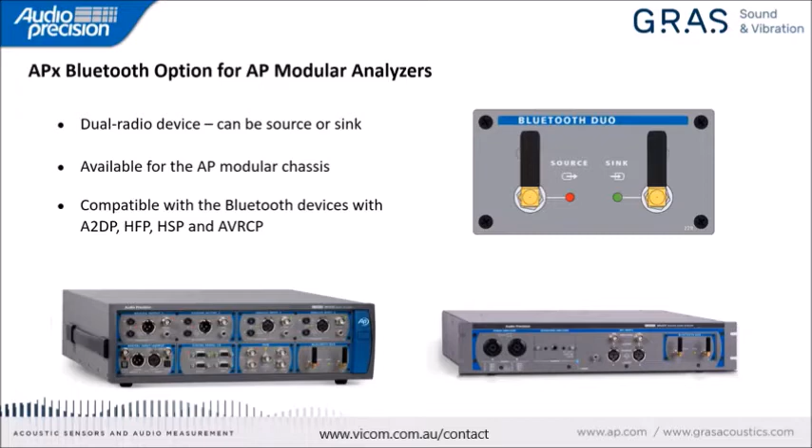And this device, whether it's acting as an input or an output, acts and behaves like any other of the modules that we produce, which means it's just another source or sink, another part of the system, and there's nothing that feels poorly thought through or not really purpose planned like this module is. So we'll be talking about that along the way. I'll highlight a couple of cases where I think the implementation is quite smooth.

All right, so as you move towards starting to get ready to make measurements, maybe the first thing to say is that you should know about the DUT, the device under test that you plan to test. Every one has its own personality and control process. This particular unit, one of the things I needed to know about it is that it has a pair of front speakers and a pair of back speaker outputs, and the hands-free phone support is only available on the front speakers. So that makes sense, assuming that the driver might be the one speaking and you'd want the speakers for the driver to hear up closest to the driver.

And so that was one element that was important. If I had picked the wrong set of outputs, I wouldn't have ever been able to measure the hands-free phone output signal. The other one is that this volume level that's controllable through the knob on the front panel of the DUT is automatically reduced to minimum at power up. And so it's necessary to set that level, and we'll be talking more about that in a minute or two.

And then the other thing is to know what profiles your DUT supports. I'm going to spend a little more time talking about profiles to drive home the point of why this matters. Some profiles have higher quality signal or perhaps less latency through them, and that impacts your measurements. So this is an interesting thing to have some knowledge of.

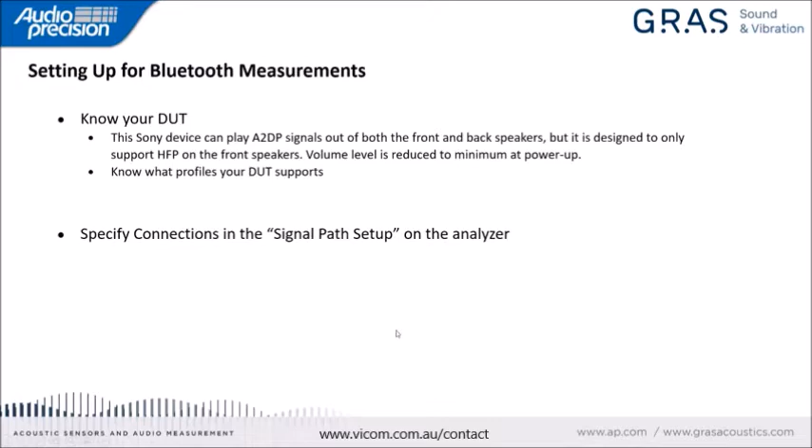All right. You likely know from working with your Bluetooth speakers at home, or perhaps you've already done a lot of this testing. There are really 3 steps that need to be done in order to connect up to a device before you can make any sort of measurements. And so the connection process is basically a discovery process where the analyzer scans the area and lists any Bluetooth devices that are not hidden, undiscoverable.

And it may well be when we take that step here in the demonstration that you'll see other devices besides this particular unit that I'm planning to do some testing on. Once you've gone through the discovery step, the next step is pairing, and it's pretty straightforward. You hit a button and the 2 devices kind of handshake across with each other and complete that process. And once they're paired, then you make a connection to the device and you're ready to do some testing.

So these are key steps, and it's really easy to forget or miss part of it, or get halfway through a process and want to stop at a point and restart it at that point, and you might find that you need to redo this process in order to get back to a known state.

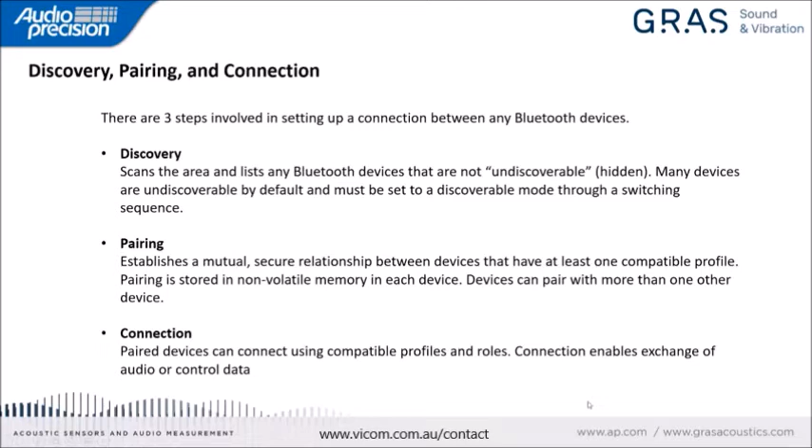All right, so here's some status indicators. You'll see these on the actual analyzer display in a couple of minutes, but I'll talk through the fact that there is a status indicator for both output, shown here, and input, which I'll show you on the next page. And this gives quick at a glance information about the state of the Bluetooth connection, or in fact any other kind of connection. We could potentially have a PDM output or something if we're testing different devices.

But in this case, we would see that the output was set to Bluetooth. It would have a device descriptor. It would tell us what mode we're in, whether we're in A2DP or HFP. And if we're in HFP, then we have this SCO, and it is either in a state of not connected or connected. And if you see the big red bar on the screen, you won't be able to do any testing until the device is actually connected and going. So we'll talk about opening SCOs as we go along here.

And this second line shows what it looks like when everything is copacetic, when it's all working like it should. And so it tells us the same information we saw up here. It tells us which codec is being used and the sample rate. So SCO, which I mentioned up above, is synchronous connection oriented link. And it's a protocol used for voice data transmission. CVSD is a continuously variable slope delta modulation codec. There are lots of codecs for different purposes. This is one example that's used in Bluetooth, maybe the most common for hands-free phone work and headset work.

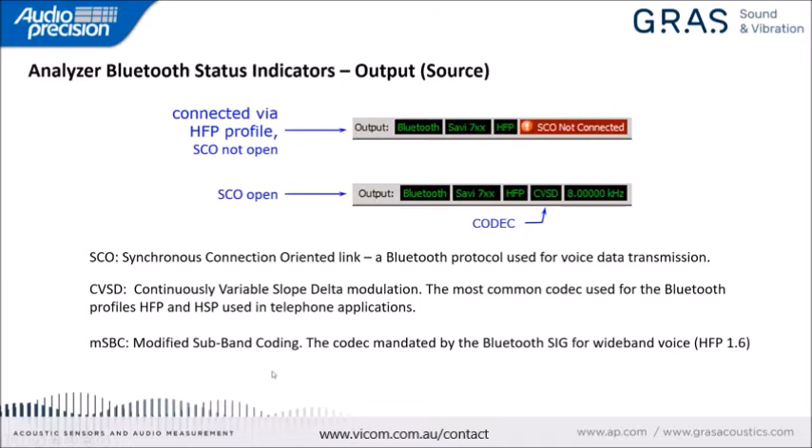Here is an example of the full monitor status indicator bar, and it's showing that we have an output that is an analog unbalanced 2-channel connection, and input as Bluetooth with a new device that we haven't talked about, just a different device. In this case, we're doing streaming audio, and it's an A2DP connection for the profile. The codec is SBC, and the sample rate is 44.1 kilohertz. So this is what you expect to see, a lot of nice green information across here. If something's red, there's a need to stop and look at it.

And it's probably worth mentioning the Bluetooth special interest group. It's referred to as the Bluetooth SIG. That is the standards body for Bluetooth, and they've specified that SBC codecs must be included in any A2DP connection.

It's possible to use other codecs that might have better performance, but this is a single codec that must be in the system for any device to use that might want to do streaming audio.

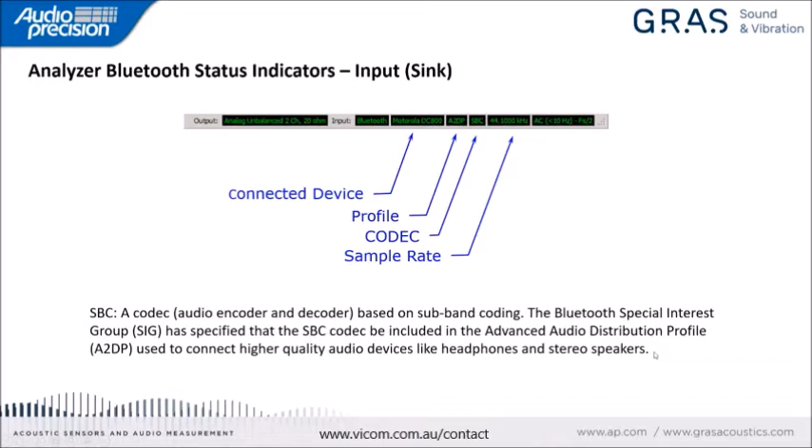All right, so with that, I think we'll move on to hopefully some more interesting stuff than just looking at slides. And what I'll do is just briefly drop this out of the way. And what you see in front of you now is the user interface for the Audio Precision APx 500 analyzers. This software is compatible with a broad range of analyzers, starting down at relatively low price and performance range, and going all the way up through our APx 555 industry-leading performance unit. So that once you're familiar with this user interface, it becomes easy to use any one of the analyzers.

I'm going to take a couple minutes to just introduce, for anybody who maybe hasn't used this software before, what the layout is, so that you get some better comfortable feeling about what's here. Over on the far left side, there's a box called the Sequence Navigator, and this area allows you to pick and choose tests that we provide in the software and place them in any sequence you prefer, and then to string them together so they'll all run sequentially, all without writing any programs. So automation is kind of built in this from the beginning.

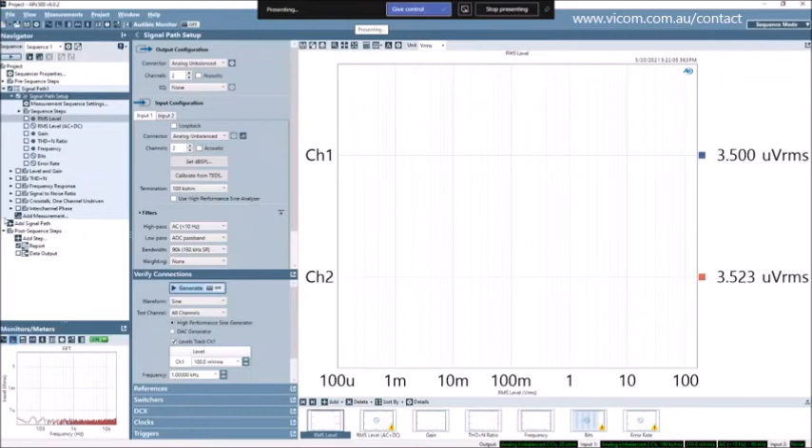In the center here, or somewhat center, is the signal path and measurement setup area. So in this area, I define what I'm going to use for an output device and what I'm going to use for an input device. And then I've got down here a little panel that allows me to verify connections. So this is used for defining what channels will be used and what kind of channels they will be. So for example, I have a lot of choices here, and there are a number of other things in my system. For example, a PDM module that I could use if I was testing, for example, digital microphones.

So this panel toggles with this arrow up here, and if I select a particular test, then it becomes the control panel for that test. And so here you can see I've selected frequency response, and I've predefined in this case what the frequency range should be and what the level should be, and I can go in and change any of these that I choose to. And once I'm done with the setting and I have valid connections, I can run the test, and running the whole sequence is simply pushing this button right here. An individual test can be run hitting this button, but it doesn't execute the whole sequence.

And then finally, this area is obviously the data display. And depending on the test you run, you may get 1, 4, 10, 12 different types of measurements as outputs from the tests that you perform.

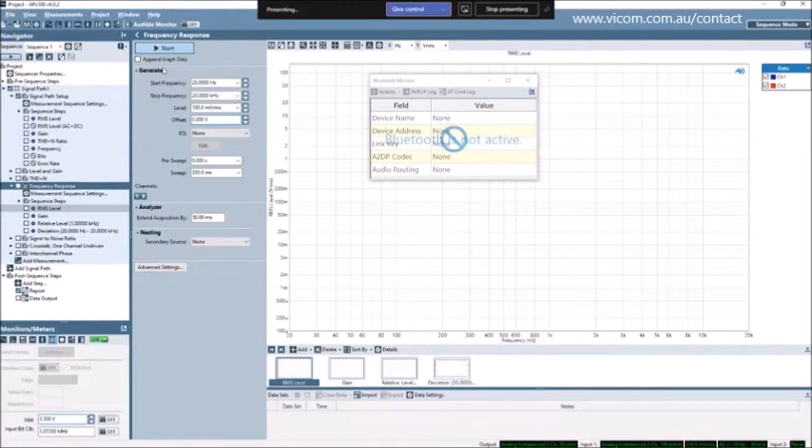And again, kind of circling back on that comment I made earlier about integration, there actually is a Bluetooth monitor. And if we pop this up so we can get a closer look at it, you can see that there's a number of different things. Now, at the moment, this is not active because I haven't chosen any Bluetooth channels.

But as soon as I do that, then it's active. And there's another really great bit of integration here that's a very commonly used panel. I'll call it back in a minute so that I can finish talking about this.

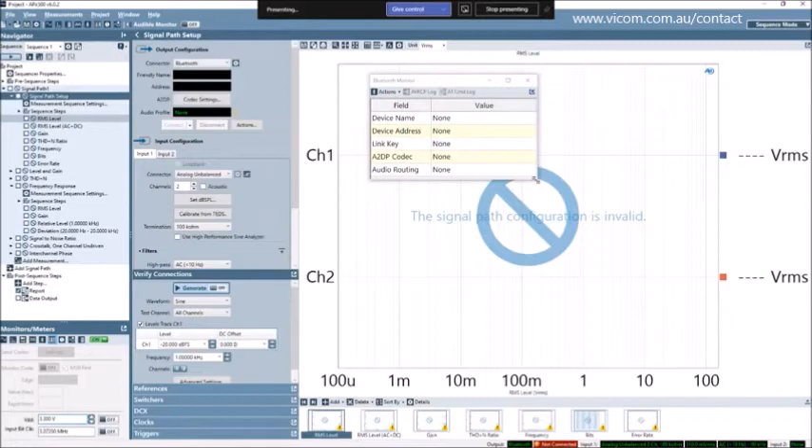So there are actions that we can do here. Depending on other things, we can do remote control and attention command logging, and then review those if we're looking for some kind of hiccup in processes that should have gone on in the system. So not only do we have waveform monitors, but we have Bluetooth monitors as part of the integration.

All right, I'll mention one more thing. This is what I consider the primary user interface, but some people prefer the bench mode to sequence mode, and I'll just pop over to that. It takes a second or two to switch, and you'll see the color's a little different. It's kind of a green tint, and it doesn't have sequencing.

This is designed as an interactive tool. The meters actually have higher update rates on them in most cases. So you can do a lot of what you would do in a sequence, but you do those as manual steps. The control for setup looks quite the same. So we could select a Bluetooth output or input here. And we can turn the generator off and on, which is something like that control I showed you previously, and control how the signal is being analyzed.

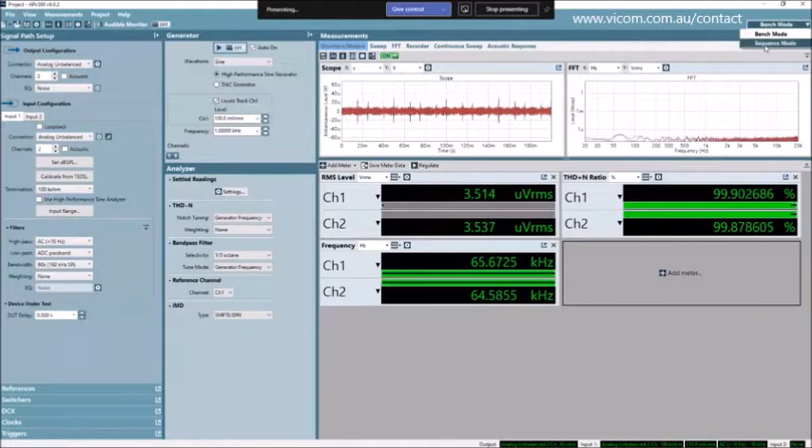It's a useful tool, and it's very good if you're trying to, for example, monitor a certain output over time. You have a time recording capability. So this is a really great interactive R&D kind of tool if you're just trying to pound on manual tests that you want to do. But to do complicated tests that you might need or want to repeat lots of times, the sequence mode is really a great thing. All right, so let's actually set this device up to test.

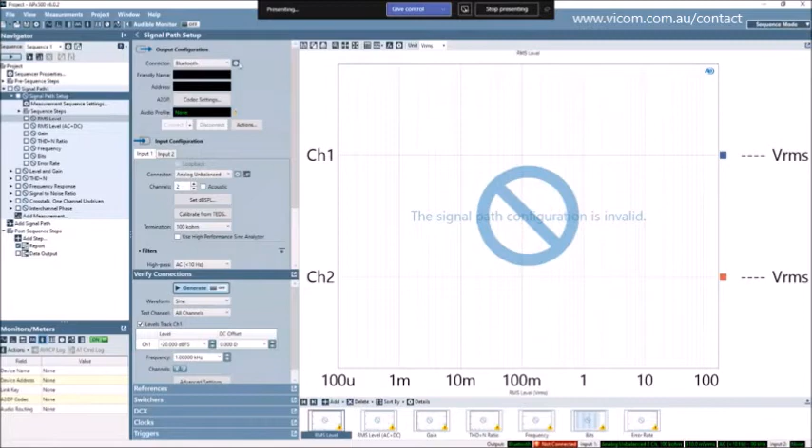Right now the DUT is sitting with the source selected to Bluetooth audio. I'll just scan through one more time so it knows it should receive a Bluetooth audio source. And then in order to pair the device, I need to put it into pairing mode, and I hold the Bluetooth button down for about 7 seconds, and then there'll be a little Bluetooth logo flashing on the screen. Once I have that, I can click on that little gear up here in the corner, which brings up a setup panel for Bluetooth.

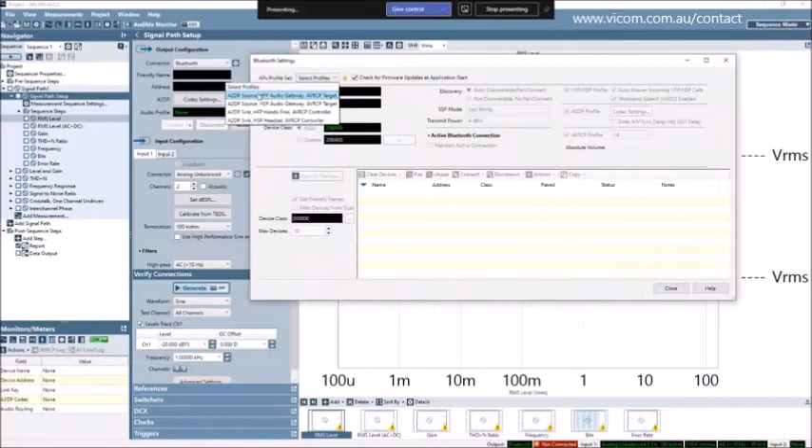I should mention that when we select one of these lines, we're actually enabling all three of these profiles. So you'll see that over here, all of these are checked at the same time. That's okay. The analyzer can be told what mode it's going to be in during the test process, and it'll automatically resort to the proper profile. So next we'll scan for devices.

This Bluetooth speaker is probably mine here in the room. I don't know whose phone this is. Somebody's near enough that I can see it. I'm not going to try to pair to that. And my device, as soon as I pair, will officially be paired. And it's looking for, if it needs it, a PIN number to be entered as a security device.

There is a mode which you can see up here called Secure Simple that allows you to not have to set a PIN. If the device you're working with requires a PIN, then you have the option of setting it up so that you will use a keyboard or display and buttons to enter the PIN number. I'll try to do this before it gets out of that mode. So everything's covered, but this just works mode is especially convenient.

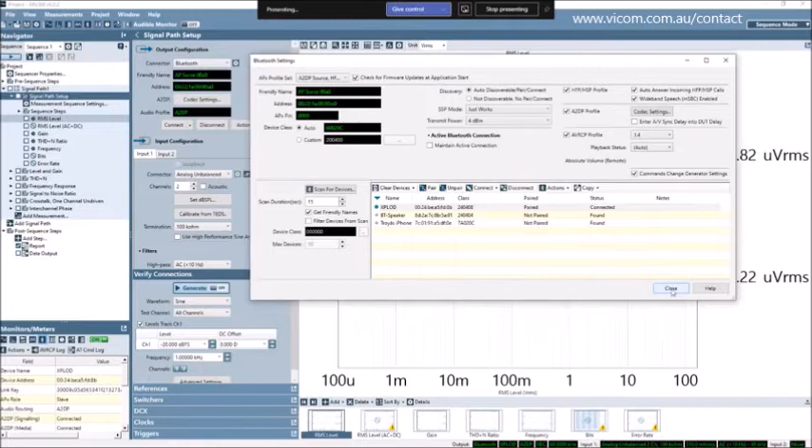All right. And so at this point, we have the system connected, and it's able to send an output stream into the device under test. And then we need to set up channels to receive the speaker output from the head unit. And this is fairly straightforward. I've already got the connectors connected to the analog unbalanced signals.

We're not doing an acoustic test. We do make acoustic devices, test system models that would be useful for doing that. But in this case, we're just collecting electrical signals. So all of that is already in a good state. And so that's really what we need to do about test signal path setup.

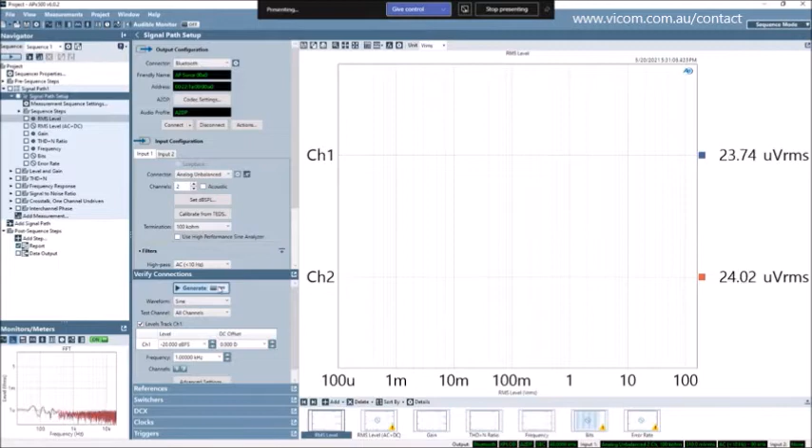What I like to do at this point is take a look at one of these monitors and turn on the generator, because if I've got everything set up right, I should see a 1 kilohertz tone or any other frequency or amplitude that I wanted based on settings here. But this gives me some confidence that it's going to work, that the connections that I made up here are correct, that the digital signal coming out of the Bluetooth is being received by the head unit and being translated into analog signal that comes to the speaker outputs.

Okay, so the next step that we need to do is set the level, and you would like the signal generally to be as large as possible, just to get well away from the noise floor of the system. And for digital devices like this Bluetooth interface, we don't generally set to 0 dB full scale, which is the maximum output. So often we would go to -3 dB. Oops, it didn't like the dB. I think I can just say -3. And now the amplitude has increased. We see a couple small harmonic spurs out here.

So we've got this in a reasonably high output place, but we would like to know, could we get more out of it without degrading the signal? And so it's kind of convenient just to toggle the amplitude up, and just going from -3 to -2 dB, you can see a lot more harmonic distortion here. So this is a great step to do, and also notice that if I go the other way, those few spurs, harmonics that you see there in the spectrum, don't especially reduce if I lower the amplitude. So that -3 dB full scale is certainly a sweet spot for this.

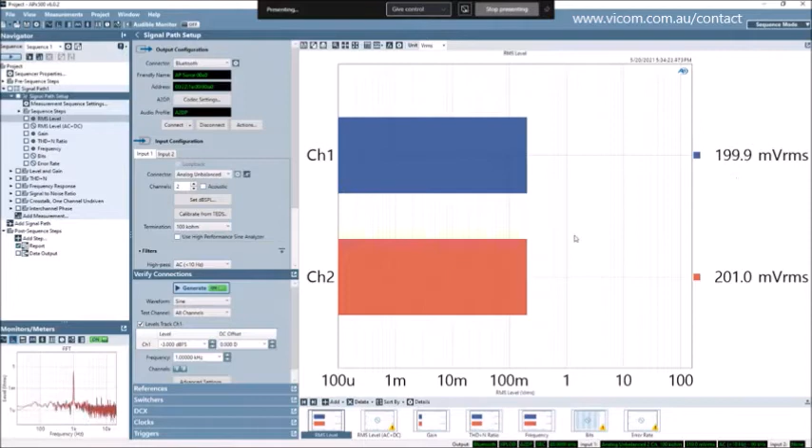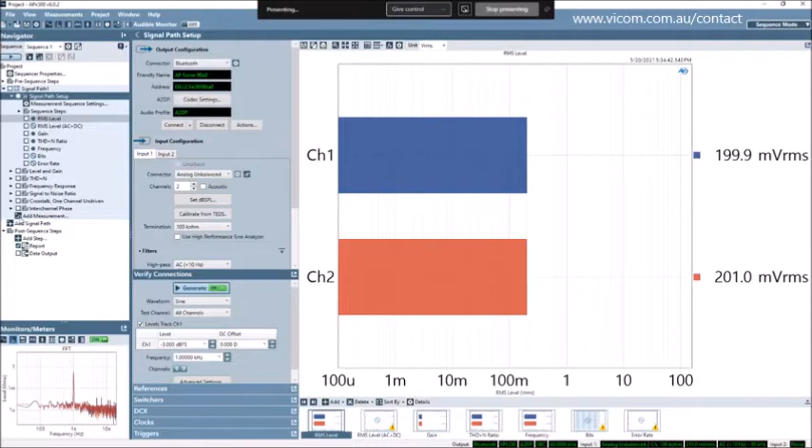So now I've got a 200 millivolt signal coming out of the device under test, and we're ready to make a test at this point, which is pretty exciting. So what we'll do is select a new test, because these tests are okay, but I kind of like to run a continuous sweep, a chirp frequency sweep on this. So I select our add a measurement menu, and this shows you all of the measurements that are available. If that's a little overwhelming, you can pick categories that are related and look for the thing you want there. I can see that my continuous sweep is here, so I'll add that and close it.

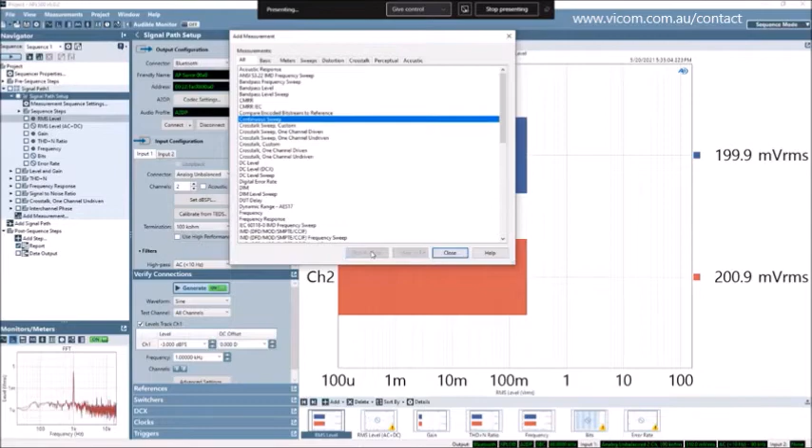And now we've got a measurement setup in front of us. So we talked about the fact that we'd like to test this at -3 dB. So I've made that setting here, and we've now got the right connection, and we've got a test we'd like to run. Let's go ahead and run it and see what happens. Now I could click on this button and run the sequence first, but I'm going to just do a quick test by hitting this start button, and it will run only that one scan. It produced a lot of results. You can see the frequency response plot here, and then thumbnails for a lot of other results that come out of this test. And this isn't anything at all that we would expect to see.

We would expect to see a roll off down here, low frequency, come up somewhere around 100 or 200 hertz, stay really flat until just before 20 kilohertz and drop off. So something has gone desperately wrong here, and now we need to figure out what that is.

So what I'm about to show you is maybe the best tip or trick I learned about troubleshooting things in the system here. So in amongst all of these results is an acquired waveform display, a time domain waveform display. And there are two things that really jump out at me here. The first one is this oddity, right here in the sine wave.

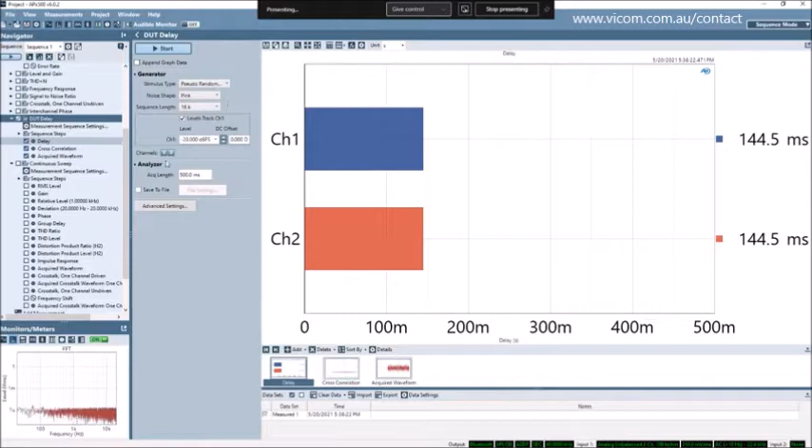And there are a couple of ways of handling that. One of them is that in the signal path setup, we could actually go down and enter in a DUT delay of 145. Whoops, I forgot milliseconds. And once we do that, we can come back to our continuous sweep test and start that again and see if the results are any different.

And there you go. Now we still got some irregular behavior out here, but it looks a lot more like we expected, and this part looks completely reasonable. So what we've done for that DUT delay is okay if we're only going to be testing this DUT in this mode, but it could be that if we later on in testing selected a different codec, or we went from A2DP to HFP for hands-free testing, that the delays would change, and then we would be back to having problems.

So rather than having a single delay that we hope works for all of them, we'll take that out. And what we'll do is go back to the measurement setting for continuous sweep, and we will adjust the time settings here. So the pre-sweep is something I'll talk about in a moment, but if I extend this acquisition to something on the order of about maybe 340 milliseconds, then things will start behaving.

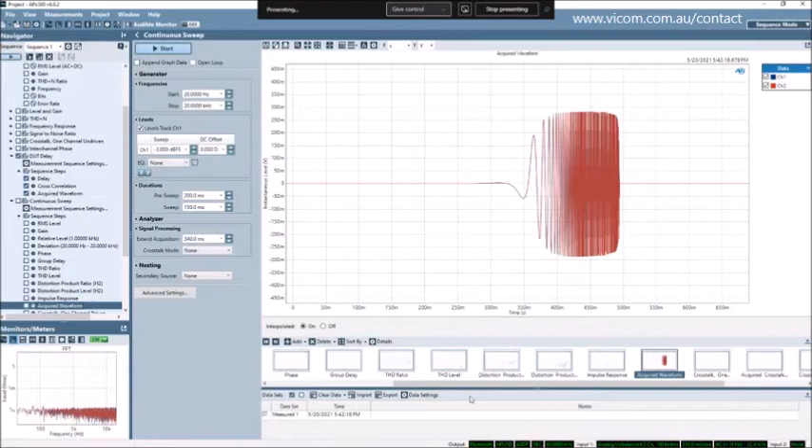But I'm going to turn off the crosstalk phase change and just run the test again, and I think you'll see that things look quite different now. So those two traces are still there. Channel 1 and channel 2 are both still active, and they're right on top of each other. And now if we go and look at the response, we have a very clean response that goes all the way out to 20 kilohertz and drops off.

So this is, I hope, a very useful little walkthrough, because taking a look at that time domain signal can give you a lot of information about what's going on with the measurement. Here is the same data, but in a relative form. So it's referenced to 0 dB at 1 kilohertz. So I think that's a good bit to consume here about the test.

But I think what I'd like to do now is talk a little bit more about sequences. And all of the process about signal path and setting up for the tests inside sequences still is the same from what we've talked about so far. I think what I'll do is start by loading a project that I already have. And in fact, I want to go to Open Project. And here I've got a number of projects. I'll grab this top one here. And I don't need to save that nice test we just created. I'll set that aside.

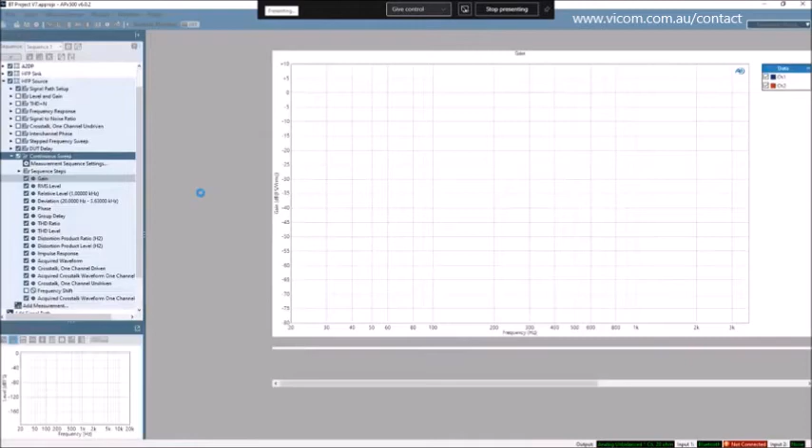And it takes a second to load this. And I will minimize the tests themselves and just show you how this sequence was structured, and begin to give you just a small feeling for how efficient and well laid out this is, and also how much work can get done inside these sequences.

So the basic sequence that's here is one that tests the A2DP connection. It then goes on to check the hands-free phone sink connection, and in this case we're talking about the sink relative to the device under test. So this is inputting a Bluetooth signal and receiving the audio signal, and finally a hands-free phone source, where the device under test is the source, and we'll receive Bluetooth data from the test.

Okay, so before we try to run these tests, I think what I would like to do is talk a little bit about a couple things. First off, one of the things that's a standard part of the software is the ability to produce reports on the measurement results. And this allows you to turn that off or on. When you're doing real testing, it's a really convenient thing to produce a document. It'll create a PDF that you can save away, or other formats of document.

But while we're doing interactive things, it tends to pop up each time we run, and it's just something you have to set aside. So I'm going to leave that off for now. I'll try to remember to turn it back on the last run we do here. Inside each one of these are many steps. And in fact, for each one of these items you see here, you can see that there are also little arrows that I can click on that show you the sub-steps of this step.

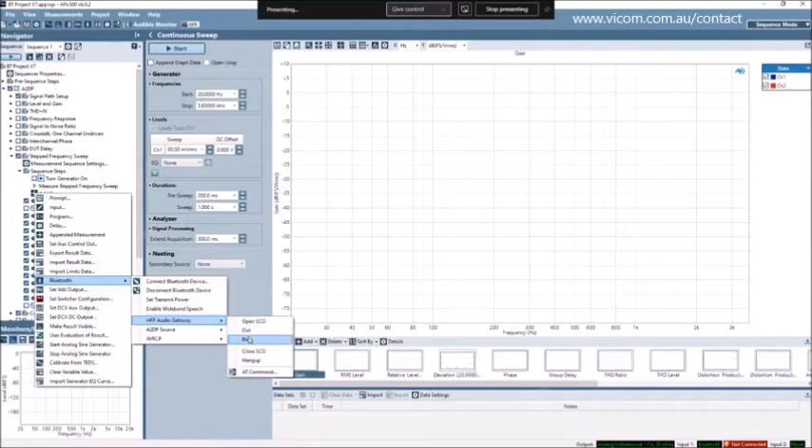So you can do the basic things like connect and disconnect and set transmit power and stuff like that. But you can also, for example, open and close a SCO on a hands-free link. You can dial and ring the device under test. For A2DP, you can start streaming and stop streaming. And for remote control, you can adjust the volume. So these are yet another indication of how well connected the Bluetooth option is into the system.

Hey, Mike, we have what looks like a two-part question, combining the sequence mode discussion and delay. Since delay is, as you flagged, an issue potentially with Bluetooth test, can that delay measurement be built into a sequence, and can the sequence then automatically apply that delay that's measured to the rest of the sequence? Yes, the answer is yes.

And in fact, when I demonstrated that delay measurement, I added it into this sequence right here. One of the ways of handling this would be to go ahead and use that DUT delay value in the signal path setup, and then change it to another value later if I get to a mode where it's using a different value. So that is an entirely practical way to handle that. It can simply be switched on the fly through the sequence process.

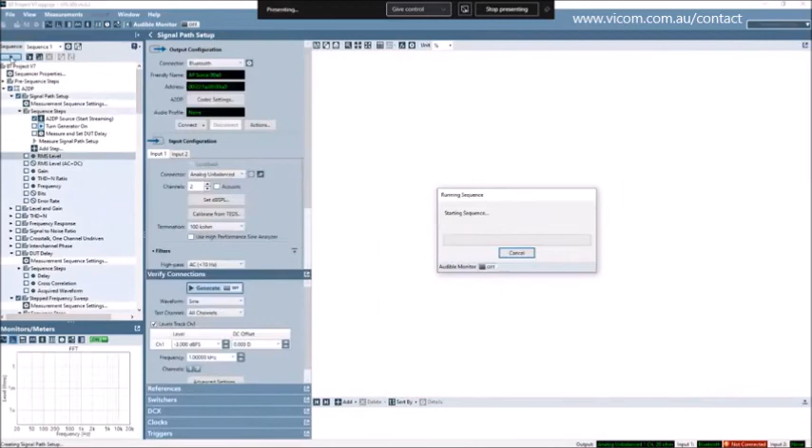So I've started the sequence, and it's asking me which device I'm going to test, and there's my device under test, Explode, XPLOD. So I'll select that one, and audio profiles is still a perfectly good setting, and so I can click OK. And now it's getting into the A2DP test already, and we can actually watch it sequence through here if I can keep up with the system.

So now it's doing the step frequency sweep, and again, this takes a little while, but it produces a predictable output, much like you would expect. So I've got this set up for a 61-point sweep. It's 1/6-octave ISO R series, and just about done with it here.

All right, so we've done that test. It's produced a number of different results, and now it's moving on to do the continuous sweep. And we're done with that. Actually, not that one. That was old data. That was actually the response that we saw. And what we just flashed through was a transfer function test.

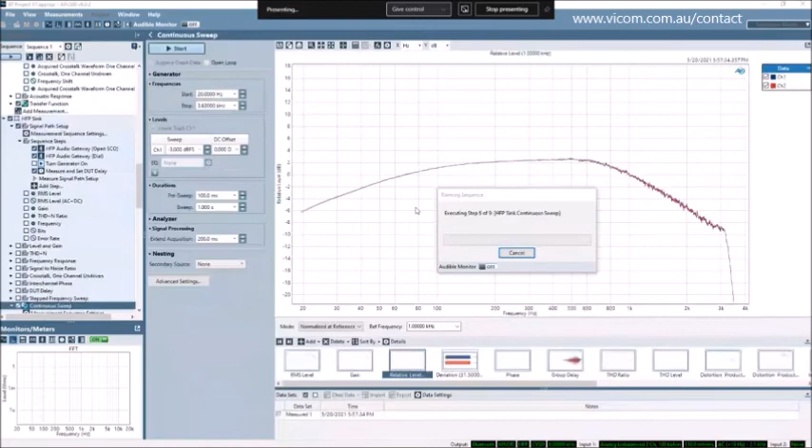And now we've switched over to hands-free profile. And this is the result we saw for our frequency response there. And now we're switching over to source. This is maybe the most interesting of the response plots that comes out of this process.

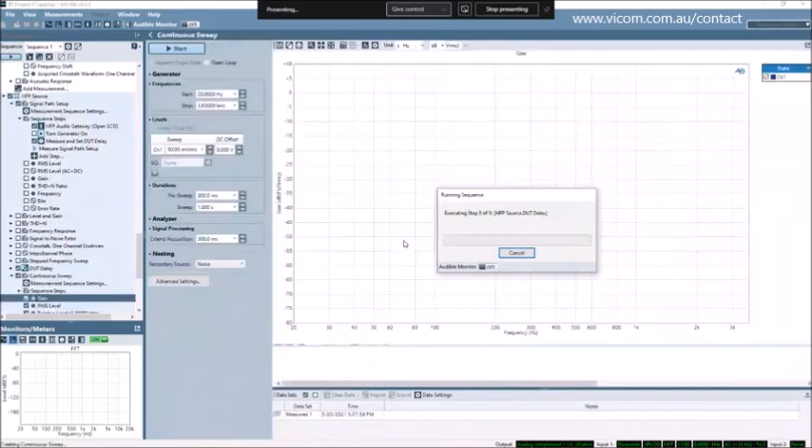Okay, so we've now completed that block of testing, relatively efficient. It would have been a lot faster if we had left out that step sweep, but I think it's a good base point. If I was doing real testing, I would say, okay, I'm satisfied that the continuous chirp sweep is a fine way of producing the same results. So we can again kind of quickly run through these outputs.

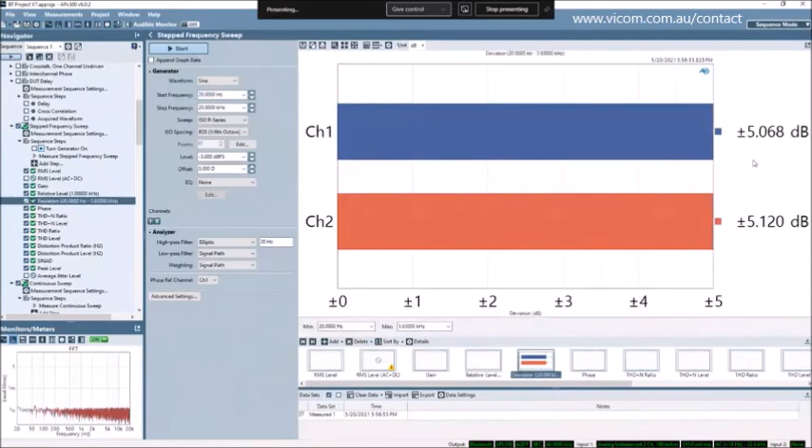Gain, there's deviation across the band, which is all on the lower end for this particular case. Phase measurement, and there are some things that we can do with this as far as how we want to look at it, whether it's linear or logarithmic, and whether we want to auto scale or fixed scale. So you can see the phase is very, very flat through this channel.

You would expect that. We've got a THD plus N ratio value showing here, and you can see through what would be considered probably most of the usable spectrum, we're down here in the 0.1% THD, which is a good reasonable target to look at. So again, a number of other things, and what gets produced out here depends on the tests that you choose and whether you want to see these results or not.

Here's SINAD, which maybe most people don't look at. So these are things you can pick and choose from, and if you don't need it, then I encourage you to take it out. It'll make your testing run just a little bit quicker. All right, so there is that test. Here's our continuous sweep data set for streaming audio, A2DP, and you can see it looks quite similar to the step sweep.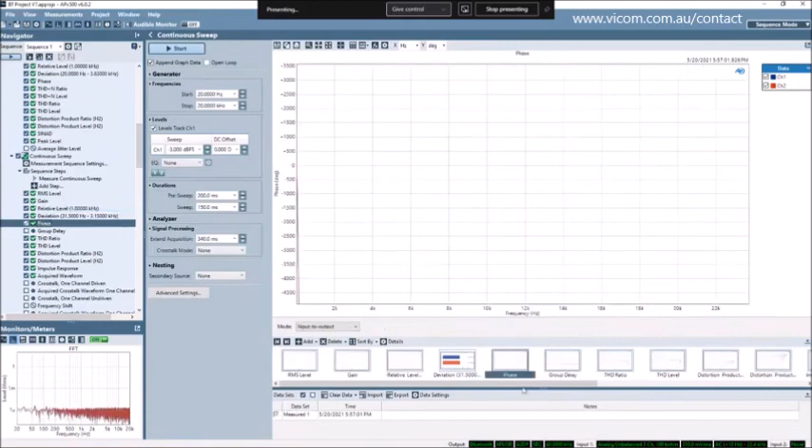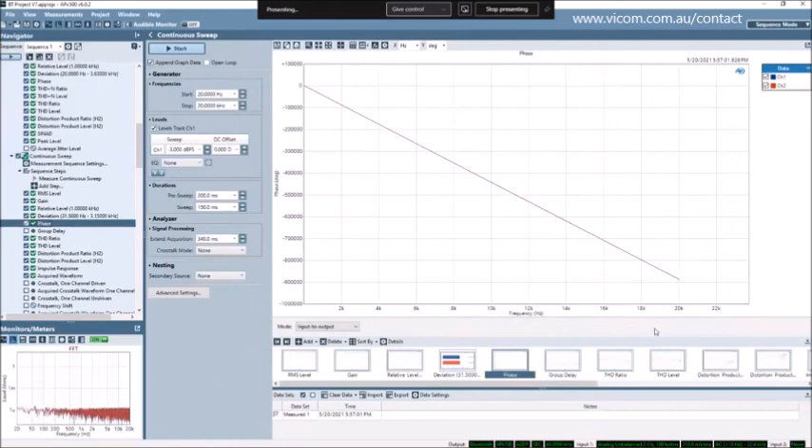Really the same data. There's our phase here. I'll probably want to do this and auto scale. And so I can present this in a number of different ways, but I think this perfectly shows the linearity of the phase across the spectrum. If you're into group delay, we can give you that. So lots and lots of results. Let's move on here. We've now moved down into the hands-free phone sink test, and we have a continuous sweep for that one.

And this is certainly a different looking plot, and one of the things that jumps out is it only goes up to 3.63 kilohertz, and that's the bandwidth you have. So, you know, I don't know that all designs would show this kind of response. Some might show something else, but this is what we saw with this particular device for this test. So it's, I think, a reasonable display.

Moving further down here, we now come to the test where we're having the microphone data come out to the Bluetooth unit. And what I see up here is a very well controlled bit of frequency response. And I guess what I see from this is that the expectation is the microphone is not going to have a lot of very low frequency content, and it's going to do everything it can to cleanly acquire in a range from 700 hertz to 3.6 kilohertz, and that gets passed through.

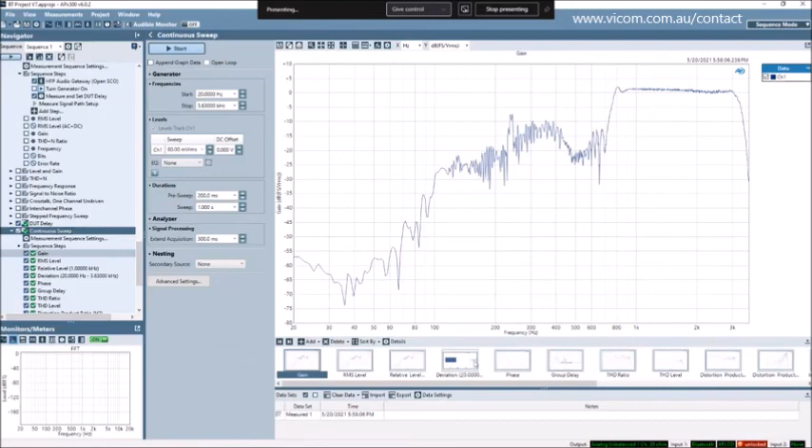So I was kind of surprised at that result, but I did it a number of times and played with a number of things to see if I could make any variation. And of course, getting back to where we started, one of the first things I did was inspect this time domain signal, and lo and behold, you can see exactly the shape that we saw in the frequency response just in this particular waveform plot. So I think that brings us to a good state.

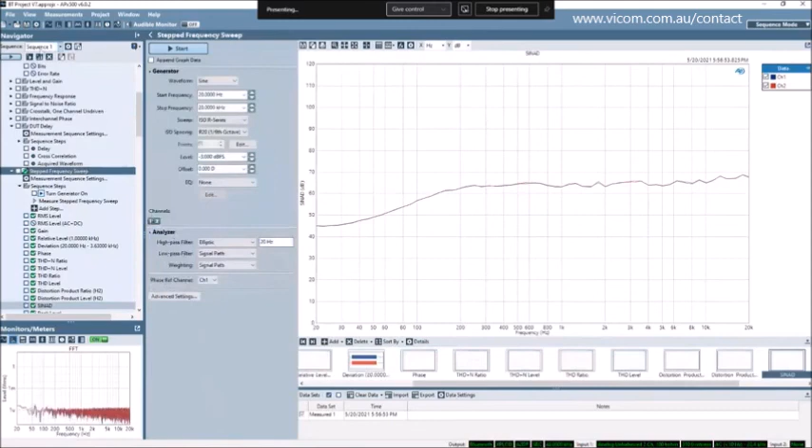We've run a minute or two past. I don't know if it's worth running the whole thing one more time. I think what I could do is turn off the stepped frequency sweep up here, so we don't have to run that, and then very quickly just make sure I check all. And then maybe we can very quickly produce an output report just so you can see what that looks like.

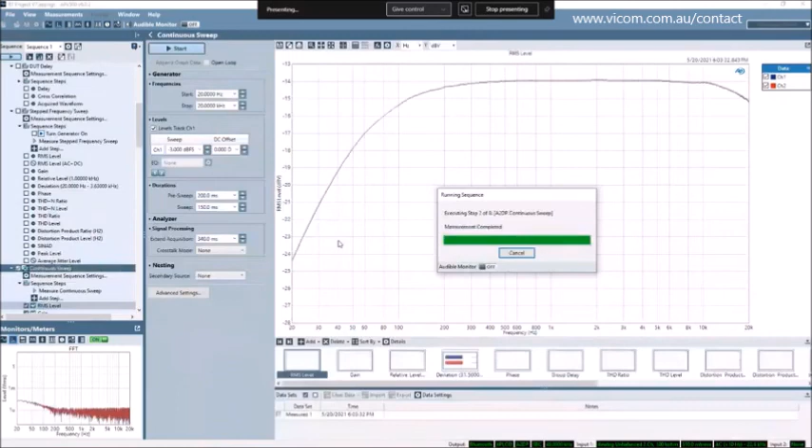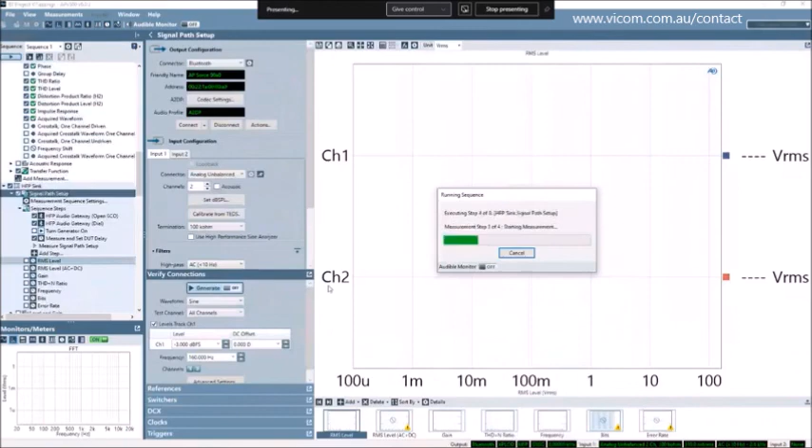And Mike, while that sequence is running... Yeah. You know, we've had conversations about various test signals. Certainly, you're displaying the log chirp signal, but using the system especially for Bluetooth, either speech signals, other broadband signals like music, noise-based signals. Is that... Absolutely appropriate, especially for the hands-free phone link.

You can very easily use broadband noise or speech, and in fact, our analyzer software comes with speech files so that you can just use them as output files. So you don't even have to create it or go looking for it. It's built into the software.

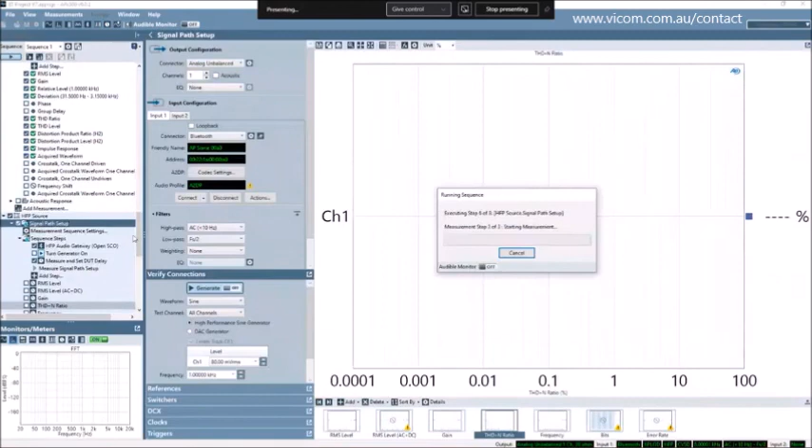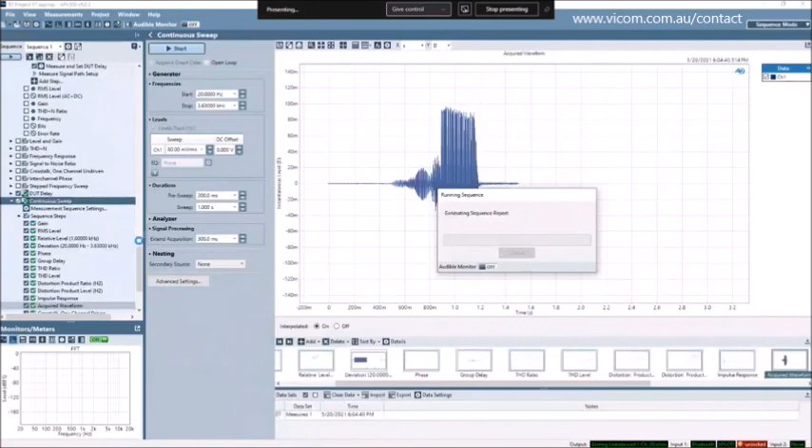I very briefly mentioned transfer function, and it's another efficient way of getting response data, and it actually does exactly what it says. It produces a transfer function plot. But for something like an amplifier channel, it's going to show you much the same as a frequency response plot. It's going to give you that information. The nice thing about it is that it can, for example, do things like plot the sensitivity of a measurement mic against that of a PDM mic, a digital mic, and let you see the transfer function.

Or I should say that differently. I was mixing two different things I was thinking about. It lets you see what the analog element was that was transmitting the signal and the digital signal that was received, so that you actually get analog versus digital transfer function data, and that's a pretty cool thing. I was thinking back to other tests I've done that used that function for microphones, and it was probably not appropriate.

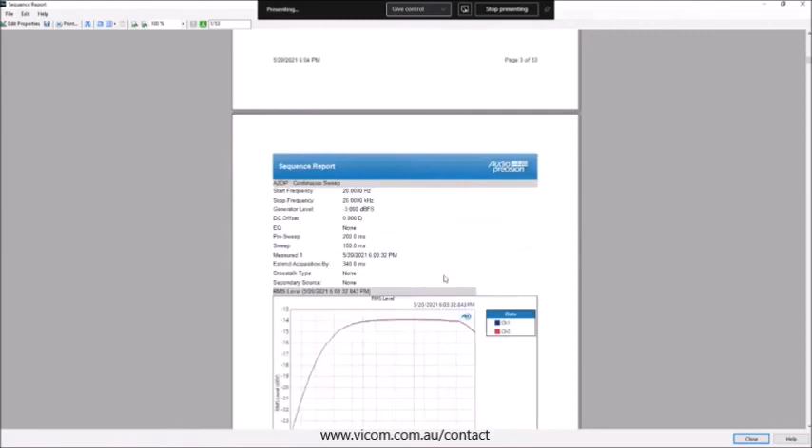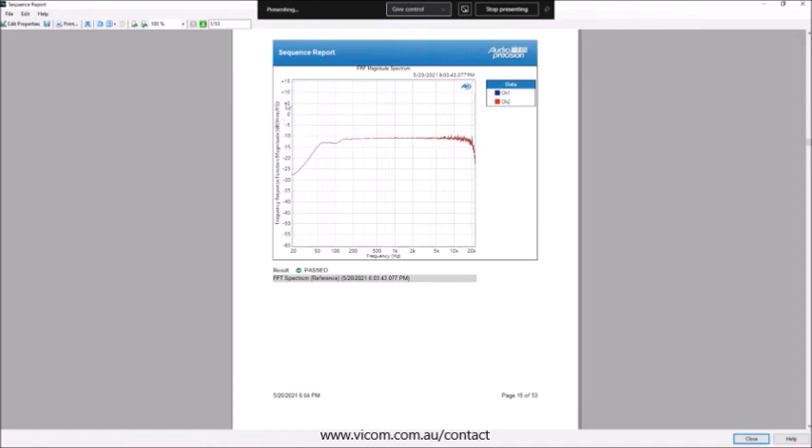So here is this report. Just quickly scroll through it. Lots of data, lots of date and timestamp information, all the plots that were produced, and this just collects every single result that was left checked on in the system. There's that transfer function. So yeah, and you can see it's magnitude dB, volts RMS versus full scale digital.

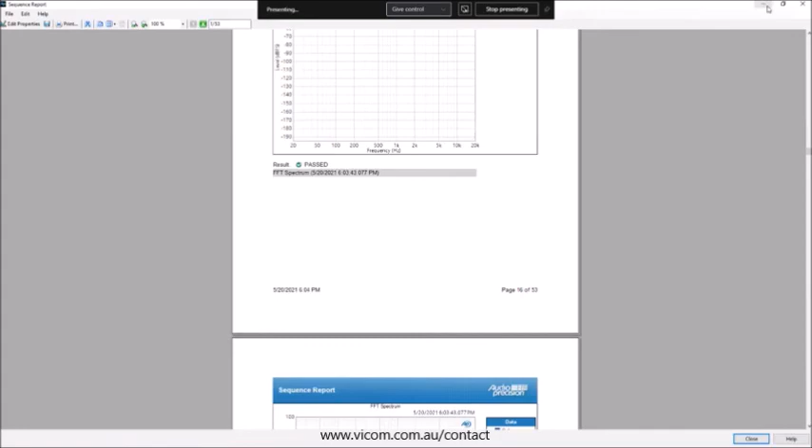So that, I think, covers the bulk of what I'd hoped to cover here with this presentation. I hope you found it useful. Something there seemed interesting. This is a good point to wrap things up.